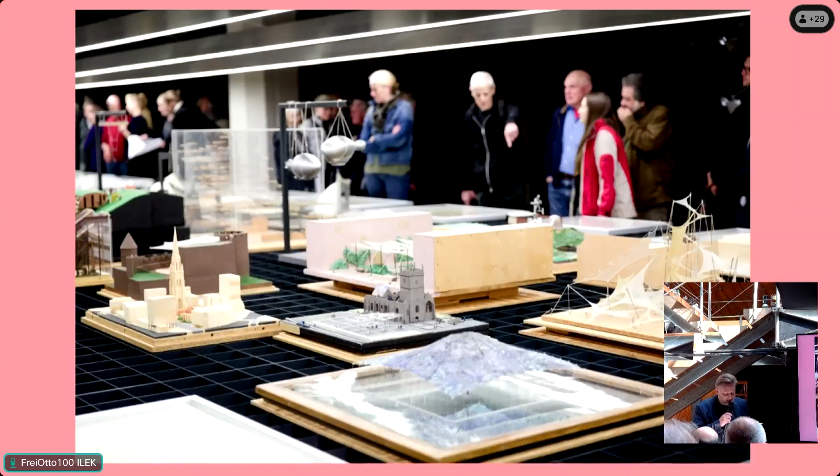Just as powerful were the conversations, the shared memories, the stories that emerged between the collaborators, the teams, the students, and the peers. Frei Otto's thinking was never locked in a file, a document, or frozen in a model or an archival object. Otto was a communication hub, like it or not, who was in contact with so many people, inspiring even more. For those of us who have studied, critiqued, or extended his work over the years, it's not about building a monument for him again, but keeping that critical openness he established alive.

And yes, it's important to acknowledge that Otto was not the first to experiment with hanging roofs, nor did the concept of adaptable building, designing membranes, or textile architecture begin with him. And yet this does not diminish his significance. His legacy lies not in being first, or being singular, but in how his work catalyzed new ways of thinking and how it creates spaces for an open debate, a critical debate, an open research question, and allowed others to imagine differently.

So the question for us is, I guess, what does it mean to build in an age where the climate is no longer stable, where the boundaries between the natural and the built are dissolving, and where the language of ecology has become both an imperative and inflationary?

So let me begin... to manage my script. No.

Let me begin with where we are here, the wonderful place where we all are gathered right now, test building for the tent structure designed for the Expo 67 in Montreal, together with Rolf Gutbrod.

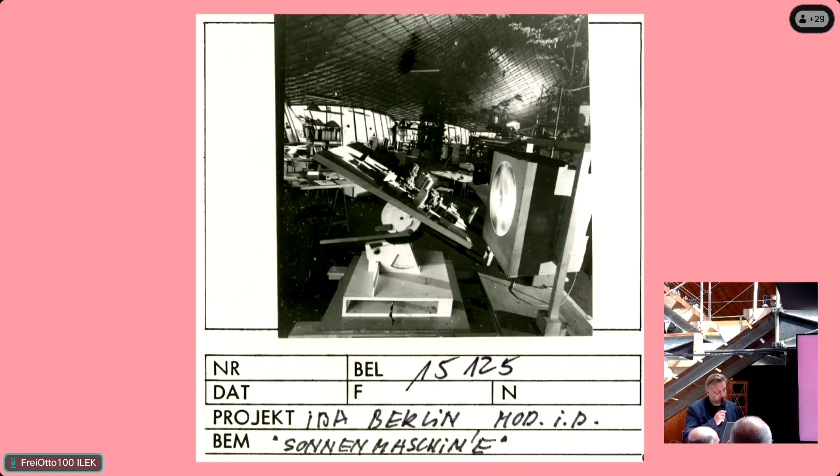While the tent can be recognized in the background of the image, something entirely different emerged in the foreground, something that might initially seem pretty trivial, even unremarkable. You see an apparatus, a so-called artificial sun, a machine for simulating sunlight and the shadows cast by buildings on physical models. This image gives us an impression of how heavy and how expensive it was, from today's digital perspective, to build physical models, to analyze them, and then measure them. And again, we can experience how analog and time-consuming his research with physical models really was.

Although it seems just a snapshot taken during the everyday lab culture here in the Institute, I have to admit that is one of my favorite images. It not only shows how inventive Frei Otto and his team were and how experimental his approach could be, but also that environmental thinking was part of his scientific imagination from the very beginning. An imagination that did not separate science from design, or technology from care.

The machine asks us about the power of the sun and the beauty of natural light, the precision of shadows, and how to operationalize natural media by technology. It turned light into a medium of spatial intelligence. Otto understood that shadow is not a byproduct, but a design material.

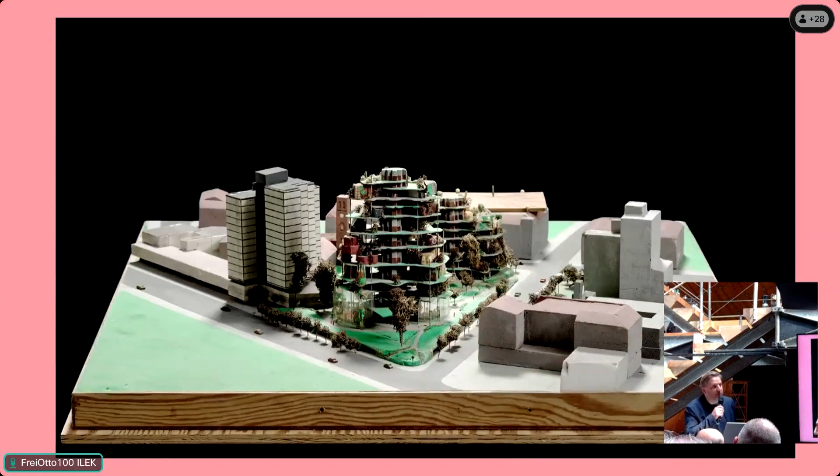translating environmental thinking into architectural form. The model in the sun machine is this one. It shows an intermediate stage of what is perhaps the most unfinished, and therefore most provocative, process in Otto's work,

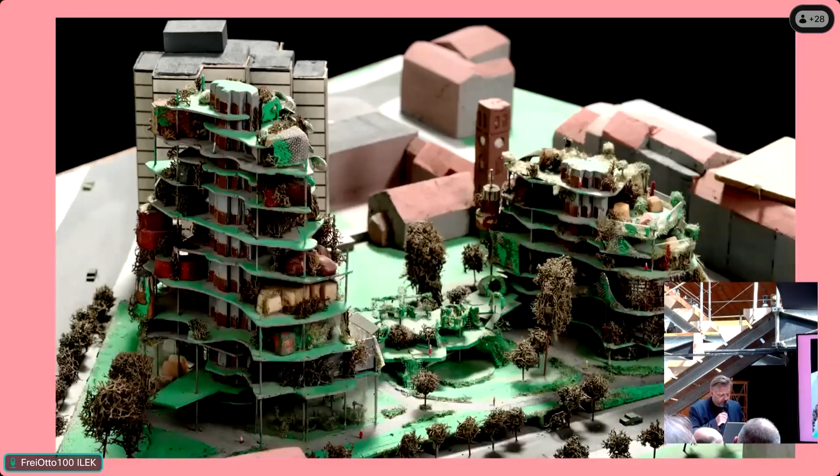the so-called eco-house project. At first glance, it doesn't quite align with the elegant visual language and the smooth form-finding narrative typically associated with Frei Otto's lightweight structures. More a big bricolage of ideas than a single coherent product. It is an attempt to interpret ecology as a question of living.

Today, I thought, let's speak not about the figure of Frei Otto as we often recall him, the engineer, the lightness pioneer, the membrane builder, but about Otto as an ecological thinker, as someone who practiced architecture as a form of experimental resistance.

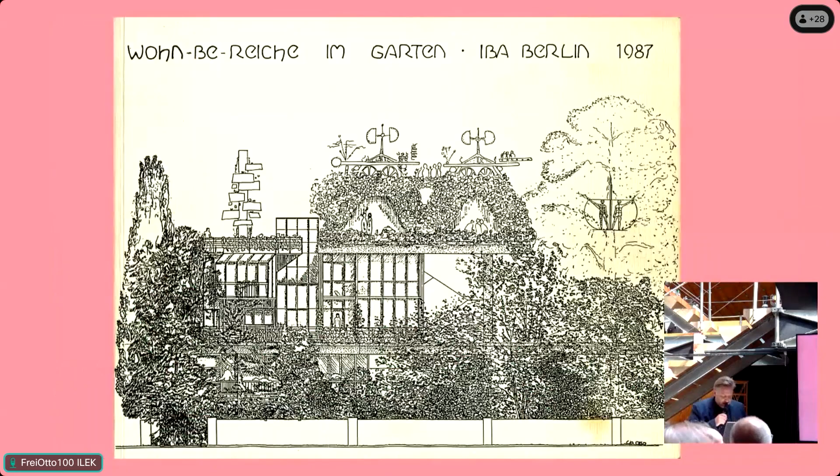Living Spaces and a Garden, preparatory study for the Eco House building project in Berlin. That's the full title of a curious little booklet, first shown to the public in May 1985, 40 years ago, at a press conference for the International Building Exhibition IBA in West Berlin.

Nearly 150 pages long, printed in a very small run. It wasn't even meant for the public. It was just a working document, put together fast, almost improvised, to help clarify what building ecologically could actually mean in the 80s.

Its experimental and almost rough production aesthetic underscored the sense of urgency with which Frei Otto sought to tackle ecological challenges in architecture back then. It radiated the atmosphere of a working document: raw, iterative, and materially open.

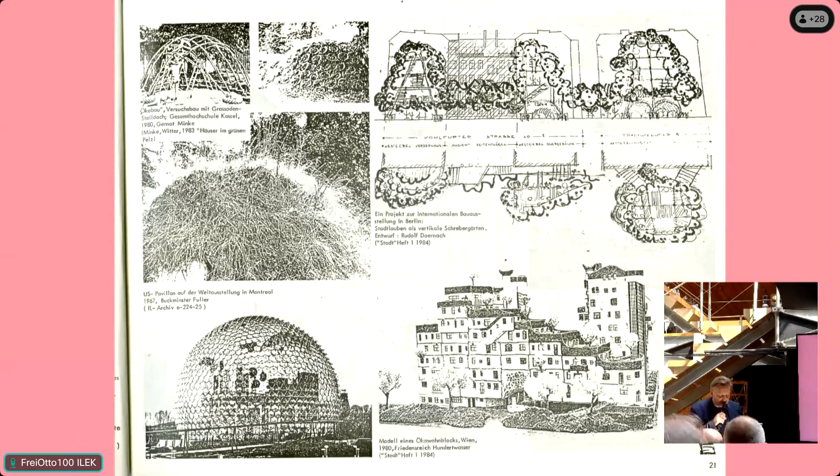But the study was more than a purely academic project. It was a direct response to the doubts expressed repeatedly during the planning process for the eco-houses designed by Otto and Hermann Kendel for Berlin.

Although Josef Paul Kleihues, then director of the division of the new building, the IBA, had explicitly commissioned Frei Otto and his team with the conception and the planning of an ecological residential building according to the principles of nature and building, he suddenly had doubts about the ecological core of the project.

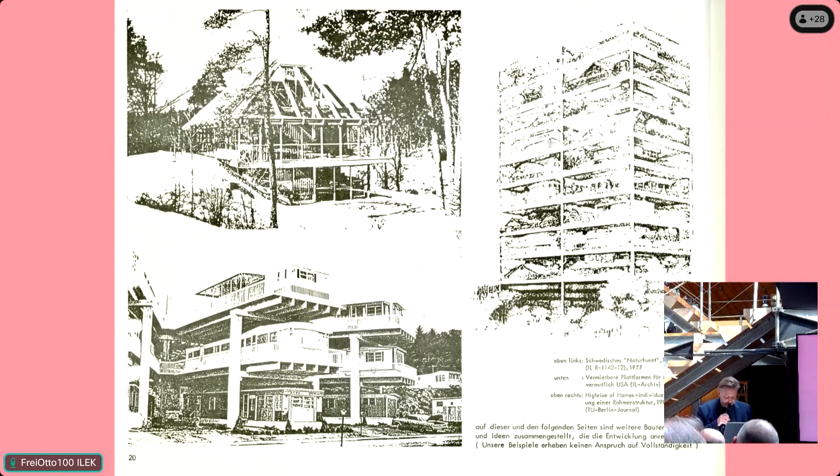This booklet carries the urgency of a lab notebook, not the polish of a publication. The booklet was a manifesto and a provocation, an attempt to foreground ecology as both a spatial and political program in the era's postmodern context.

And basically, the core of the booklet is based on three strategies of how Otto tried to convince the IBA board that there is a core of ecology in this housing project.

The first strategy was this collage you just saw. The second one was a huge and very fine-tuned timeline about his idea of nature, building and nature, including many, many of his own ideas.

So it was not a 100% scientific, objective, historical timeline. It was a very subjective piece of design. He designed the timeline basically for himself.

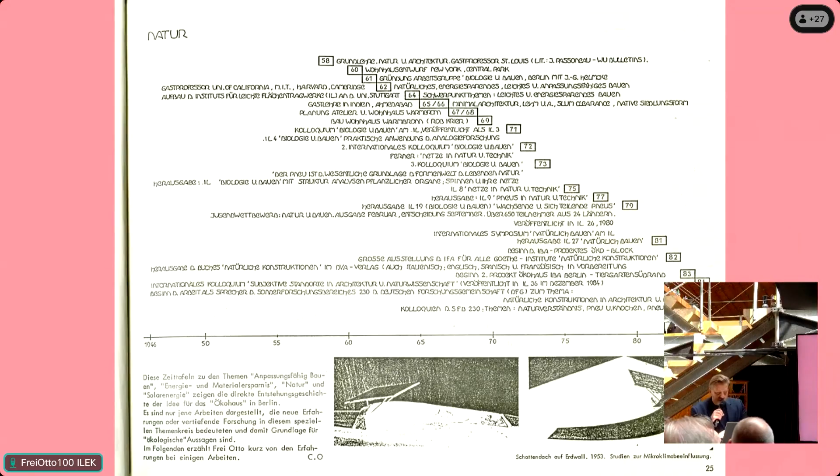And the third strategy was always looping back to his own track record as an architect or as an engineer. That means bringing in as key references his own, let's say, student projects on housing. And one of the key images, or drawings, for the last strategy is this one here, which basically

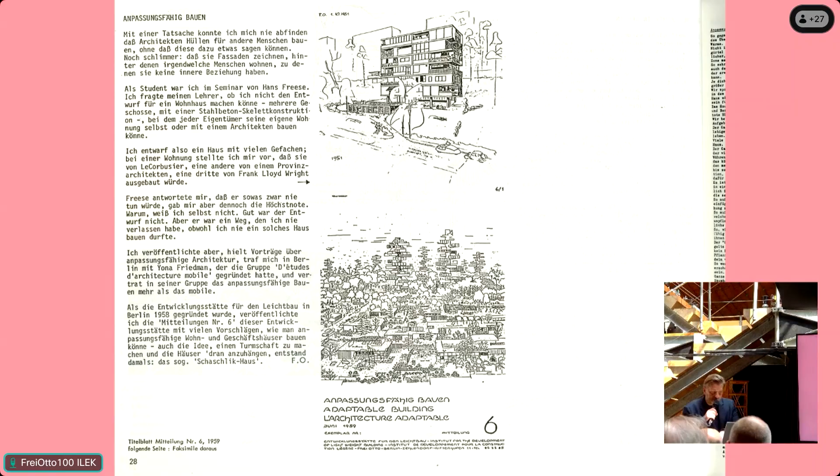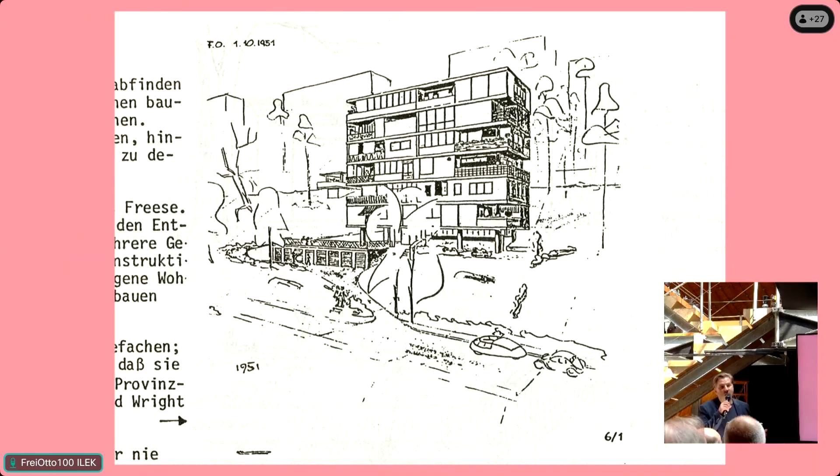shows one of the earliest housing projects Otto developed as a student in 1951. And there's a great quote Frei Otto used to comment on this beautiful drawing he did as a student.

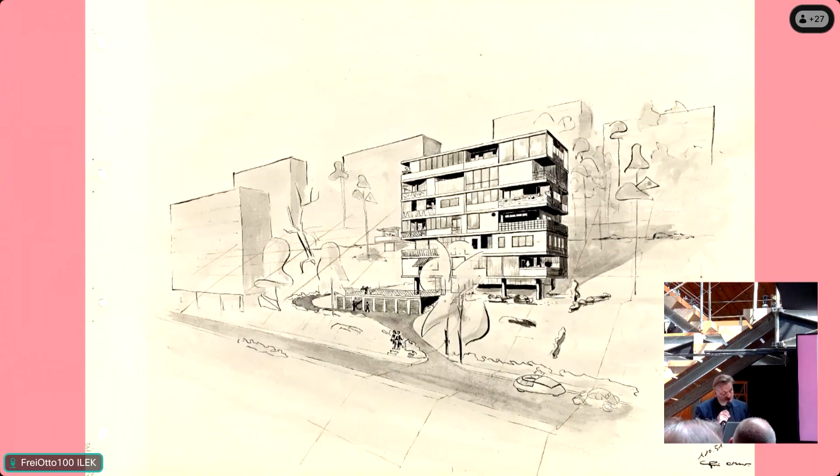So Otto said, 'Every apartment is sold together with the accompanying part of the lot. There is therefore not just one owner of the whole building. Every partial owner has a total unlimited right to ceilings or the middle of the central wall. With his architect, the owner builds his home as he sees fit. He has complete freedom to do so. The less the building department worries about artistic matters—it must, after all, negotiate with every individual owner and perhaps with a number of architects—the more interesting the building will become.'

Le Corbusier builds the one apartment, a Wright, Frank Lloyd Wright, or a Bonatz, the other one. Every different people live in different apartments. You can see it from the outside of the building, and you know immediately who lives there, what end.

So this was Frei Otto in 1951, just 26-year-old, finishing his study in Berlin and already thinking beyond the frame. At first glance, the stacked single-family home, that's the title, sounds like a dry typological experiment. But what Otto outlines here is not just a housing model, it's a social collective vision of ownership. You can disagree on it, but Otto sketches one of the earliest blueprints for participatory architecture in post-war Europe, I think.

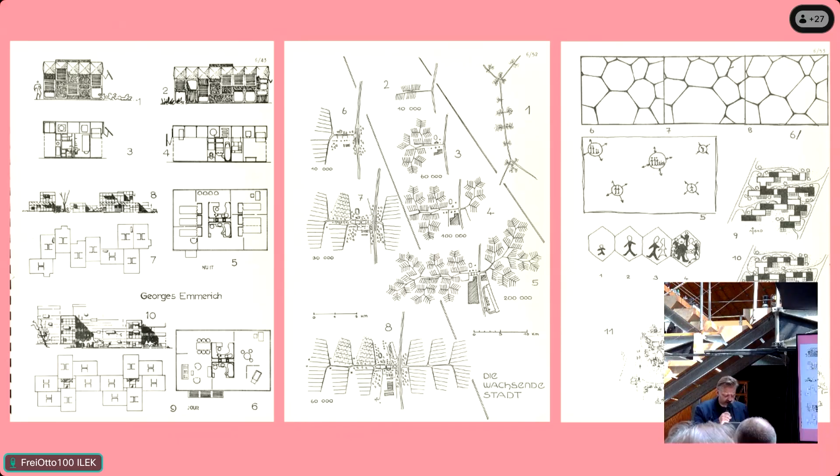The spectrum of assembled contributions range from lesser-known works such as Flexibility, the Planning and Design of Structures by the American architect Anthony Harray, to more popular projects such as Martin Wagner's The Growing House, or Yona Friedman's L'Architecture Mobile, or even Rolf Donner's Dynamic Housing Shell, as well as all kinds of references to industrial architecture by David George Emmerich and Konrad Wachsmann.

Frei Otto appeared here in multiple roles, as always, sometimes as an intellectual architect and author, sometimes as editor and a curator of ideas of other people.

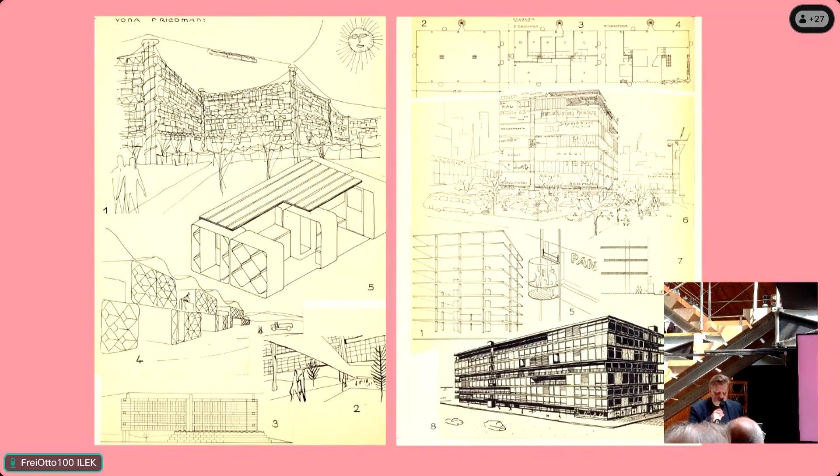One central chapter of the manuscript stands out: apartment buildings for New York. In it, Frei Otto sketches a vision for 3 green residential towers located in Central Park. Where else? Unlike his earlier shelf system projects, these towers were attached to a central spine, giving each residential floor the freedom to be designed independently.

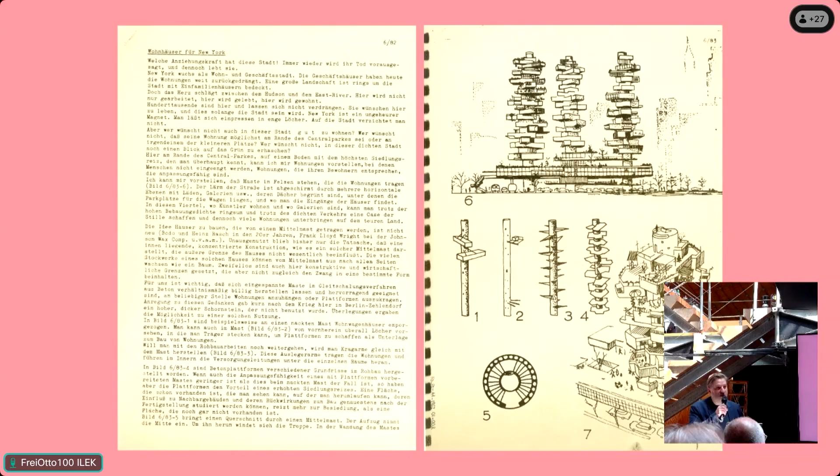The building is oriented in all directions, he wrote. There will be sunny, shady, and wind-protected places. There will be places where no one can look in, even in this densely settled city of New York.

And here again, Otto anticipated a mode of architecture that was ecological, we can disagree. It was flexible, we can disagree. And it was social, we can disagree. There were towers in Central Park, but it was an interplay of light and shade, and privacy, openness, public and private.

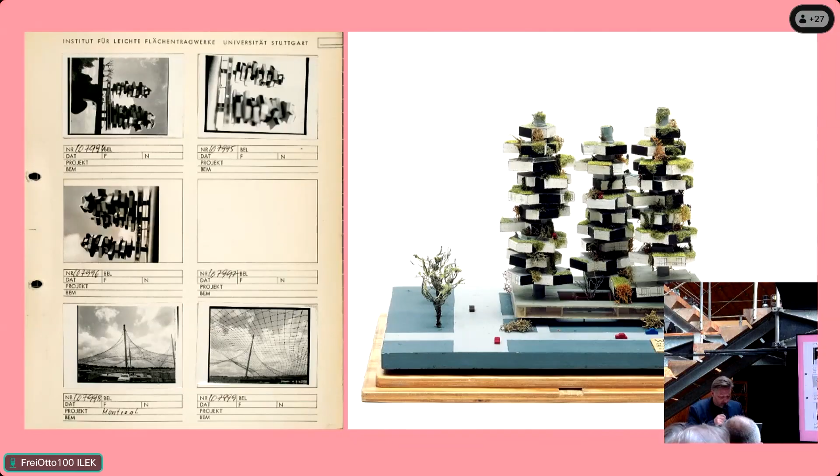So, let me conclude with a few thoughts. First, the Eco House project was Frei Otto's long-standing and ultimately unfinished attempt to bring it all together. A big synthesis, not just of materials or techniques, but of decades of experiments, models, and insight about society folded into one big single project. It was not about comfort, not about efficiency. It was about integration, about rethinking what a building could be when it holds many systems, technical, social, ecological, all together.

The Eco House was less a product and more a provocation, a spatial code for charging design with political urgency, and then just build it.

Second, the question of living and how we inhabit the environment in our world was always there in Otto's work, quietly. From his students' project to his vision for New York City, from tents to platforms. But with the Eco House, it became a lens for imagining not just new buildings, but a new kind of society, different people, different desires.

And in the end, the Eco House wasn't the answer. It was a big question, built large. Was it idealistic? Perhaps. Was it too open? At times, yes. But what Frei Otto offered was not a closed model. It was an open vocabulary, a grammar of ecological engagement in architecture that continues to challenge us today.